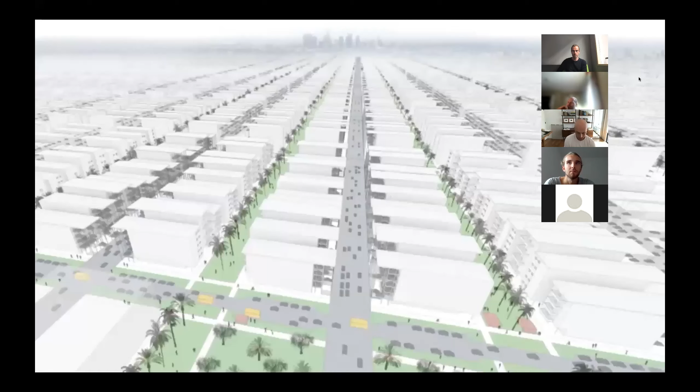A new zoning ordinance that outlawed dingbats, along with the recognition of their structural vulnerability, established a negative sentiment that rudely set the decline of the dingbat image. However, through officialization of its historic status and re-representation by artists in the 2000s, a new fascination in its image and typology rose. The re-enchantment of the dingbat reached a broad audience, including historians, architects, residents, and the mass public. Many consider this odd, sometimes ugly, building an important contribution to Los Angeles and contemporary life in the metropolis.

We will explore the dingbat's representation through three distinct timelines: economic, sentiment, and media. First, let's understand what a dingbat means formally.

The dingbat is a two-story wood-framed apartment building constructed between the 1950s and 70s, built to the maximum area of the single-family lot with tucked-under parking, 5 to 12 units, and approximately 7,500 square feet. They were cheaply and efficiently constructed for-profit development and fulfilled a need for medium-density housing, bringing many people to the city. The dingbat can be thought of as an exterior billboard facade facing the city with cheap housing hidden behind.

Diving into the three timelines that unravel the mystery of the dingbat. The prehistory of the dingbat is tied inextricably to the history of the growth of LA. Western expansion across the country and dreams of sunny weather and single-family home ownership caused the city of Los Angeles to grow from a minor city of 100,000 people in 1900 to more than 1.5 million in 1940.

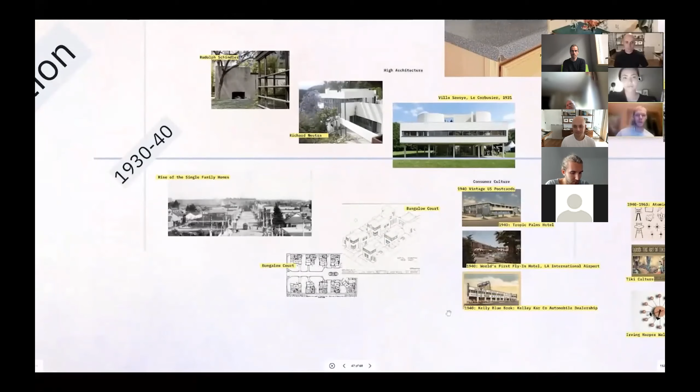As the city rapidly expanded, it was racially redlined in order to demarcate areas of security and desirability. With growth, new ways of housing the masses were needed, which resulted in California-born typologies such as the bungalow home and the tightly clumped bungalow court. The single-family home was the living style of choice.

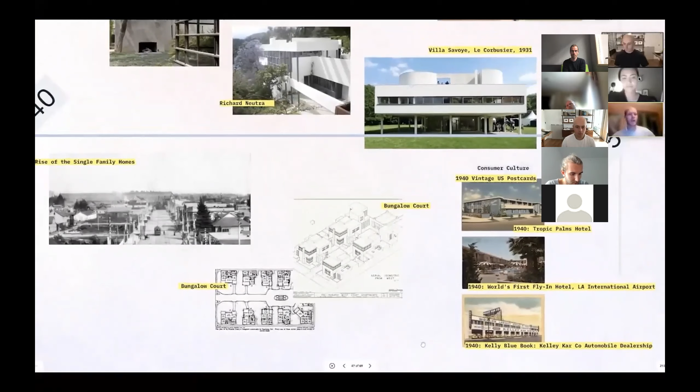Modernist architecture styles from Europe that symbolized ease of construction and new ways of inhabiting the world began to seep into the built vernacular of Los Angeles. These changes brought with it car-centric design and the rapid materialist consumer.

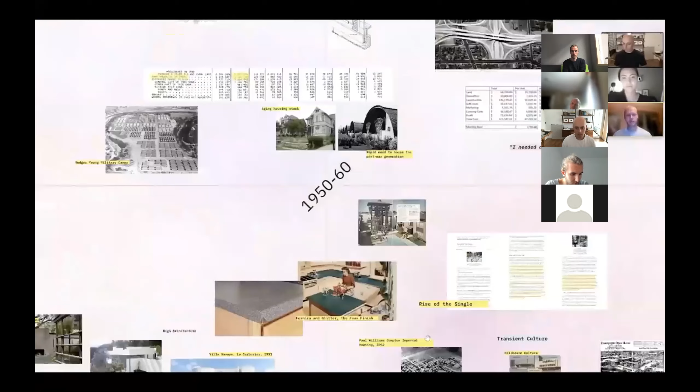Following World War II, the population increased by over 1 million in 15 years, prompting a boom in building and fresh ideas of how a city should be inhabited. Temporary military housing like Rodger Young Village was removed, and newly built freeways displaced Black, Brown, and other communities. An urgent need for the replacement of the housing stock was materializing.

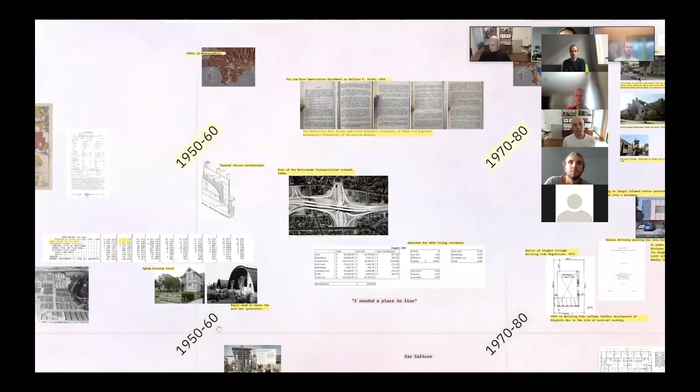With most land in Los Angeles taken up by single-family homes, many radical ways of building were introduced. The dingbat was a 2 to 3 story multi-unit dwelling with 7 to 10 units that occupied a single-family lot. This cheap but efficient mode of construction enabled housing relief, whereas the outer corners of the city experienced development on large swaths of land.

The dingbat allowed for living in the midst of the city near freeways and with quick access to places of work and fun. The popular atomic age ornamental doodads known as dingbats, which gave the type its name, allowed each residence to project itself as an existing billboard, papering over the repetitive generic design of units within.

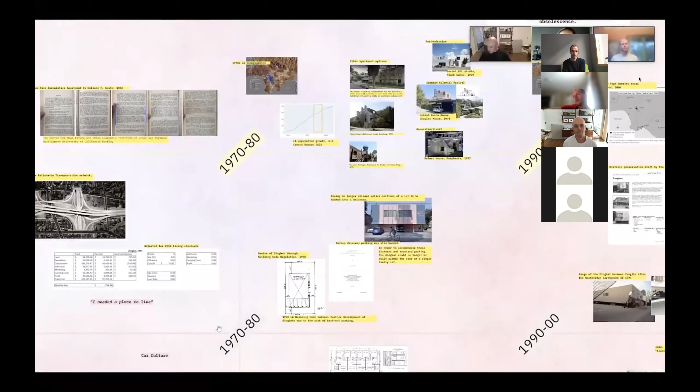During the 1970s and 80s, just as the dingbat became part of the cultural imagination, improvements to zoning requirements led to its decline. The new parking regulations passed in 1970 required 1.5 parking spaces for a 2-bedroom apartment. This made the dingbat apartment not as appealing to developers and essentially halted the building of the typology.

At this point, Reyner Banham had already brought the dingbat to popular culture and made its image iconic. The work of artists Ed Ruscha, Lesley M. Siegel, and Judy Fiskin, among others, feature the dingbat apartment prominently, as it can be seen from the street in the drive-by. These critical works of deadpan photography brought even more discourse about the self-advertising apartment in Los Angeles and the West Coast.

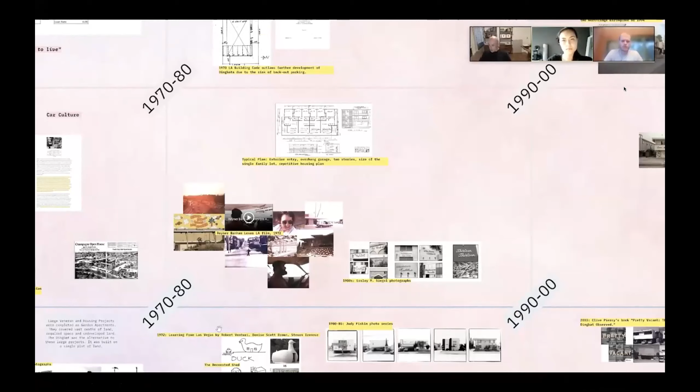The artists used mostly black and white photography. This medium sanitized the happy pastel colors and made the images archival and matter of fact, chronicling the dingbat as a phenomenon and embedding it in architectural and art discourse. Thus, the Venturi Scott Brown decorated shed has become a duck.

In the 1990s and 2000s, LA demographics solidified its status as a cultural melting pot. Middle-class families gained economic power. Mid-century buildings started to show their age. Demand for efficient densification threatened old-time relics like the dingbat with obsolescence. Responding to its quick physical degradation, but a small growing fan base, the LA Conservancy drafted a preservation plan for the dingbat in 2003.

The 1994 Northridge earthquake caused over 200 soft-story dingbats to collapse. Not too long after, in 1998, the film Slums of Beverly Hills underscores the economic divide in LA using the dingbat as its backdrop. The dingbat's reputation starts to decline.

In media, however, professional photographers start to capture the whimsicality of mid-century Googie architecture. Clive Piercy embraced the crappiness of it and spread his infatuation for dingbats in a 448-page photo series. His work responds to Judy Fiskin's deadpan technique using black and white photography. Some photos are in motion, while others are angled. This careless but honest representation addresses the typology through an outsider's perspective, which is increasingly less subjective.

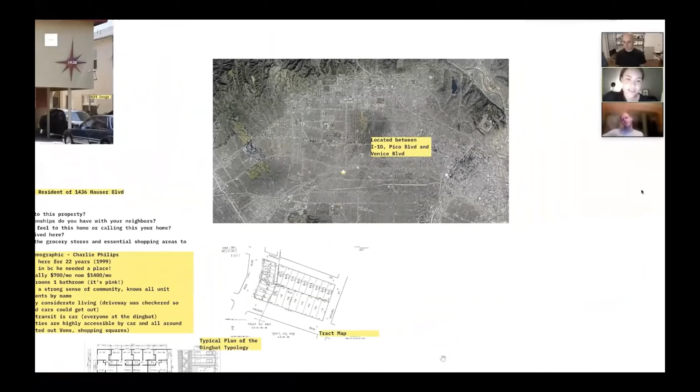And we got the opportunity to interview one of the residents there, Charlie Philips. When he first moved in 22 years ago, he just said, I just needed a place to live. 22 years later, he knows all the residents by name, and he feels the sense of camaraderie and community. And he now says, I enjoy where I live because everything is accessible by car and because he has the sense of community in this Hauser dingbat.

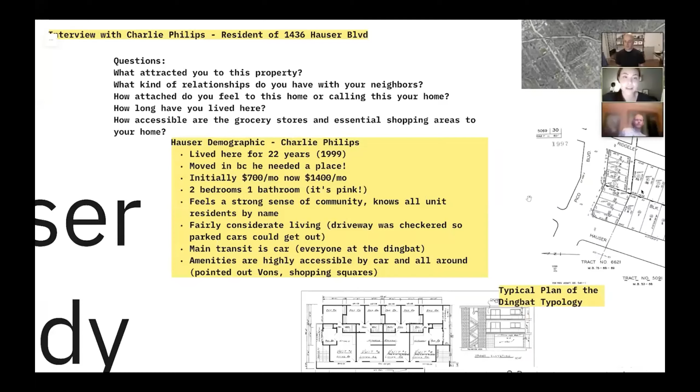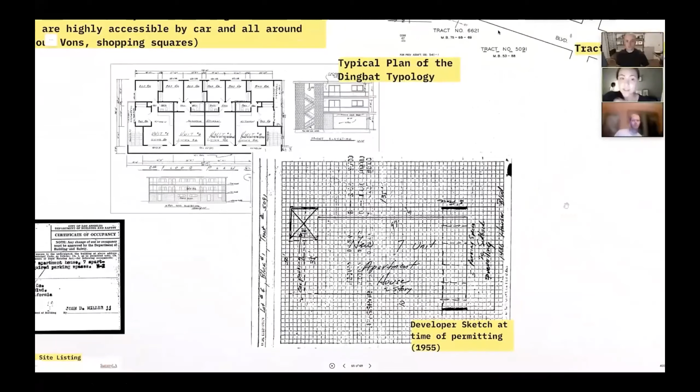This dingbat, from a collection of historical documents that we found on it, used to be a single-family plot, and now it's a multifamily property. The explosion of the dingbat was built on single-family lots back in the 1950s and became more and more available, taking advantage of and maximizing the plot, using the tuck-under parking to accommodate vehicles. It follows a typical dingbat floor plan, and it is currently listed as a historic site and is undergoing soft-story construction.

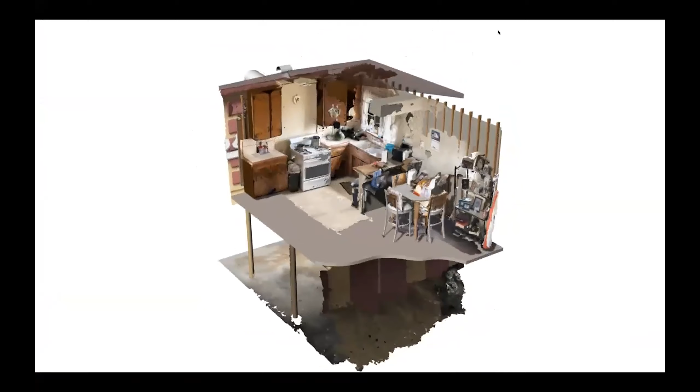During our visit, we took copious photos to create a photogrammetry model. This is a close-up of Charlie's apartment, mainly the kitchen and living room. Here are our results: a turntable of the model we made, showing the interior juxtaposed with the exterior of the Hauser apartment building.

And this is just a fun little piece that we made where you can move around and essentially create a dingbat as any contractor would at the time, a simple stucco box with some decorations.

So finally, the dingbat has represented an affordable housing type that is not only affordable, but also an attractive figure of what could be affordable. Questions of its sustainability still remain. How does this building give residents dignity?

Does it even matter? Owners will pay around $300,000 in the next few years to retrofit up to code, which may mean an uptick of up to $38 per month in rent for the next 2 to 5 years. With an increasing need for densifying metropolitan Los Angeles with affordable options, the dingbat may see more challenges functionally and financially down the road. At the same time, a rising tide of artists, historians, residents, and fans altogether may be its salvation. Thank you.

Thank you. Amazing, thanks, fantastic. So, wow.

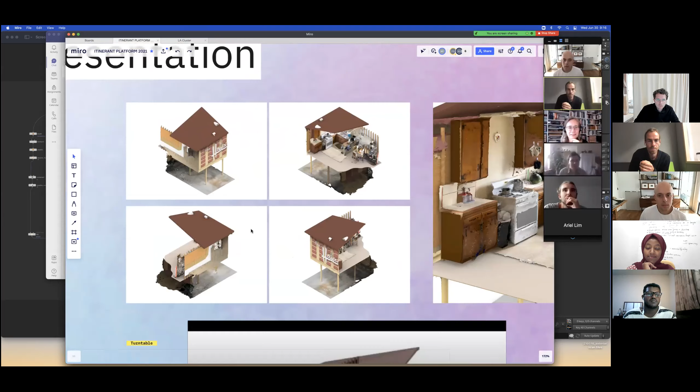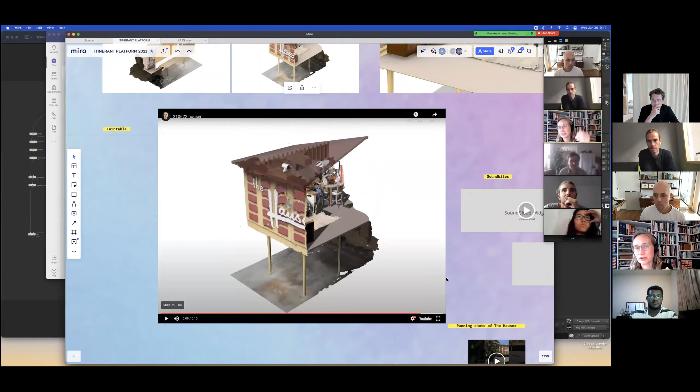It's interesting for several reasons. It's interesting because here you give us some information that's beyond how the exterior plays into popular culture and the imagination, and also because this interior image becomes a statement of artwork in itself, adding something to the representation of the dingbat. As far as I saw in the presentation, this hasn't been the focus of the many artists who have documented the dingbats, they've sort of stayed on the street. Could you share a few thoughts on what this adds to the representation of the dingbat?

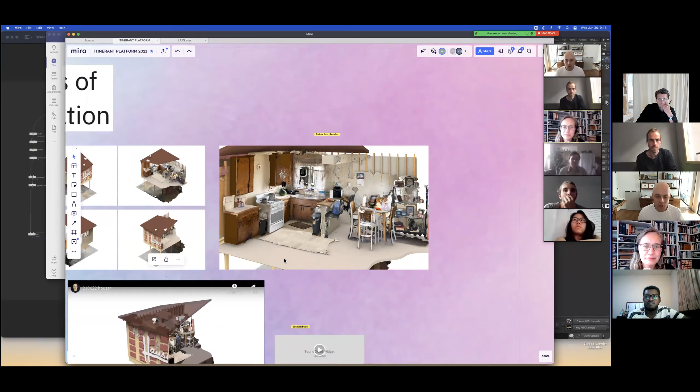Well, interesting you say that. We actually found that there aren't a lot of photographs of the interior, and we had the tremendous pleasure, and were honored, to be allowed in just as things were opening up after COVID. This gentleman let us in, and it was really cool to get to walk in. He's been there for 20 years, and it seems like a lot of the furniture, and the bathroom, wasn't changed, as if time was standing still from the 70s. So it was really interesting to juxtapose his kitchen, with his permission, with the exterior, because it's as if we get to look behind the curtain, behind the advertisement.

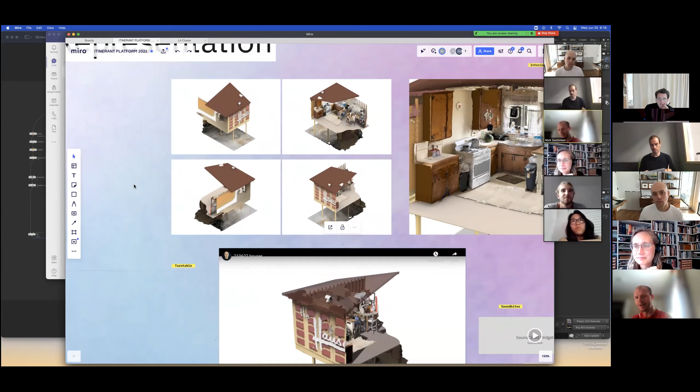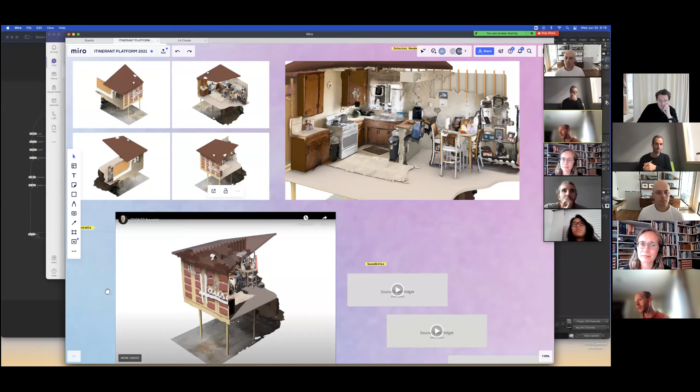Yeah, and we also noticed, as you did, that there isn't a ton of information about these interiors. They're kind of the hidden or introverted part of the building, whereas the billboard or facade has been well represented. We found it quite interesting that just in the last couple of years, with platforms like Zillow and other apartment rental sites, you're suddenly seeing these interiors photographed, maybe more in a commercial sense. So the collapsing of the two into one space, we thought, was the most interesting or relevant approach.

Mm-hmm. Yeah, what a great question.

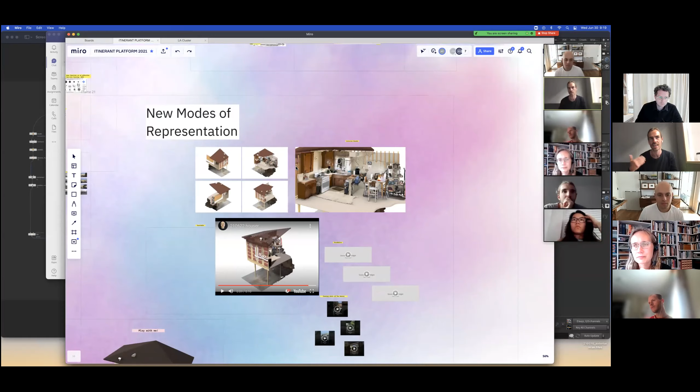I can't help myself to jump in, but I think that is so spot on, because as Natalia is saying, it's producing a new form of representation. It's seeing a new relationship between the iconic exterior and the imprints, the remnants of a lived life of Charlie, who lived there for about 20 years. This idea of looking behind the curtain is very interesting, because in one way it's a revealing of the inside, but of course it's also kind of a veiling, since a veil is something that can mask, because it is a new representation. Nick early in his presentation talks about rebuilding this kind of digital image of it, so we're relaunching it in some way. I think that discussion is very interesting.

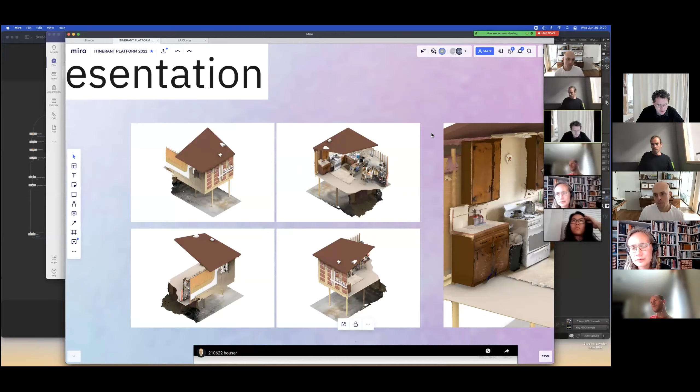If I can just quickly jump in as well, I think something you mentioned with regards to Clive Piercy and this kind of artwork, what you call the archival quality of something, that you can actually create content that makes things archival in a sense. It's a really interesting idea that we can keep producing things that offer perspective into something historical that can be used in the future and offers this new perspective. I think this idea of making our own content to create discussions is really important.

Overall, I think it was a really, really thorough presentation, and I just want to congratulate you on that.

A really interesting moment I want to return to briefly is the moment you identify that the LA Conservancy landmarks this building type. So rather than individual instantiations of this building type, we have the preservation of the type as such, perhaps unhinged from the specific author, the designer and/or the developer. There's also a geographic specificity in that these are all in the LA region, but we're not talking about one historically preserved neighborhood—this is diffuse across a larger geography. And I wonder, rather than reproducing those presuppositions, the erasure of the architect, the erasure of the developer, if we focus more specifically on the kind of financial structures behind these projects and this broad-based development you've identified, what that might begin to reveal.

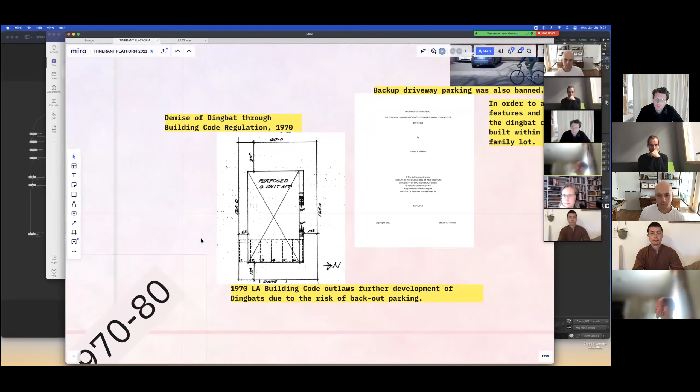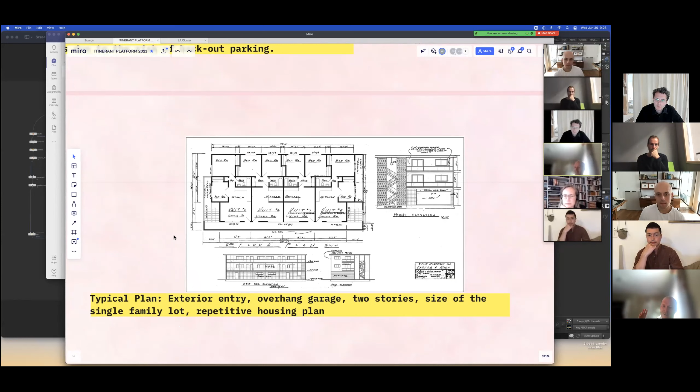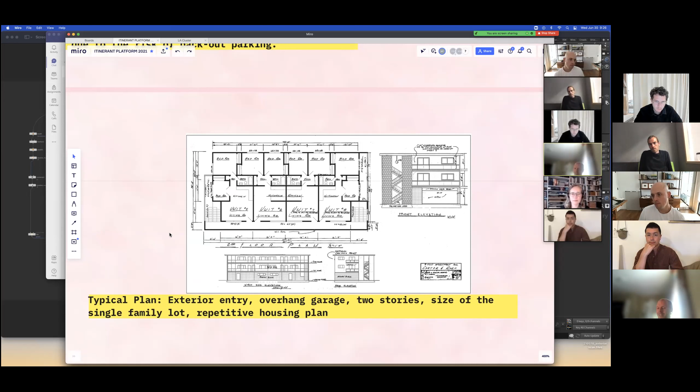I think maybe what I found most important was that they were simply using a single family building site. My understanding of affordable housing today is that it often needs to be a large project, and it doesn't change much if it's just housing 8 new people affordably. But what we saw in the 50s and 60s when these were built at a very large scale was that they were able to house many people affordably. LA's population grew by 1 million in 10 years, and many of the newcomers lived in these buildings. So it's about shifting from seeing affordable housing as something that must occupy a large project, to seeing it as something that can be done on a small scale many times.

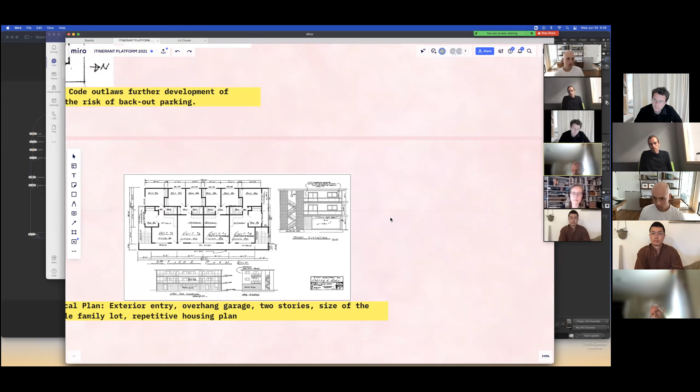I also think diversity in types is very important. We can't just be building 5 stories, and we can't just be building ADUs. There needs to be all kinds of versions fulfilled, because people have different lifestyles—some live closer to work, some live far away and they're okay with that. There needs to be different housing typologies.

Is there any concern that now that these buildings are preserved, they might actually lose their importance, or become too popular, and suddenly you're destroying the actual quality of this whole complex? That it's actually—you used to be able to do a lot of different things to the building, but now it could actually be doing more harm to the architecture than good by preserving it. That would be my worry.

I really like your presentation, and also this kind of optimism and naivism which you see in the early drawings, and it's kind of strange how it's also lost a bit when it gets updated and preserved. So it's difficult to keep this balance. What do you think about that?

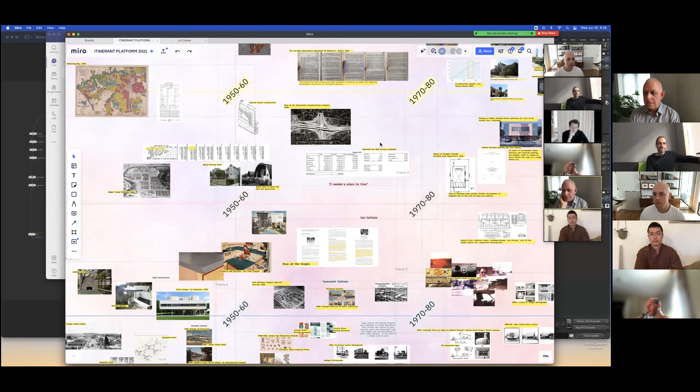Well, I think the dingbat has persevered because of the sheer numbers at the beginning, and as colorful as it is, I don't think it's self-aware. It just is what it is, and people choose to preserve it because, as human beings, we get nostalgic over things. And as has been pointed out in previous discussions by Masha, as the stock begins to deplete, and as some owners, landowners, and management companies choose to maybe demolish them unless they're preserved, there's going to be less and less of them. So that will increase the demand. And once they're preserved, their value also goes up, and interest and care for them will also increase.

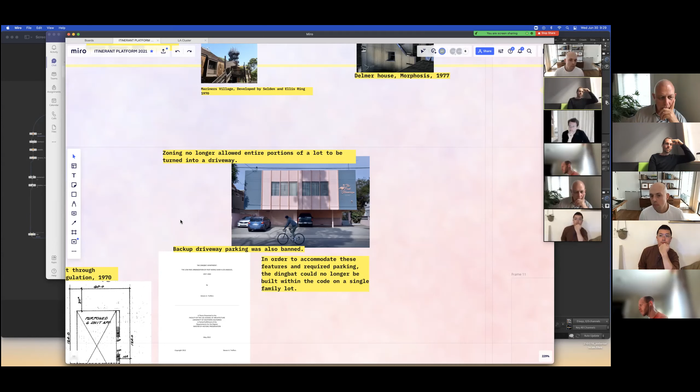So I think that will also invigorate even more interest, and maybe the typology could be updated for the current age—not necessarily mimicking it, but taking the qualities of density, the location, and things like that.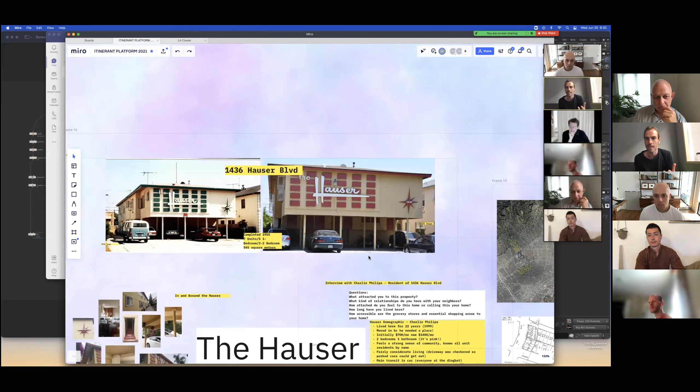We have to wrap up, but there's a lot more to go into, and the question of preservation—we can talk about the strategy of keep updating its image, and the idea of something that's preservable is something that's fixed. So its flexibility, its adaptability to different situations through the last 50, 60 years, is perhaps considered part of the dingbat. What is it going to become when it becomes a fixed image of—they want to preserve the idea of it and it's no longer contemporary? It's always been a part of culture more than, as we say, Charlie, who lives in the house, doesn't actually know that he lives in that house. So that's not where the house lives. It lives in culture, and in other forms of culture, which is also an interesting discussion. But I don't want to take any time from these really good questions.

I just want to say, maybe a last comment—I want to congratulate you for your amazing work. I love the way you take us through that, the flow moving between the images, how right in the beginning you situate us in LA, then take us through these 3 different ways of looking at the dingbat, and then bring us to your own reintroduction of another digital image and new representation of the dingbat. I think it's really strong. So thanks for your great work.

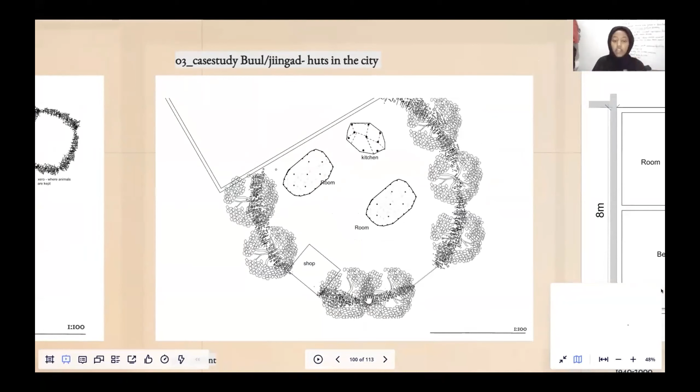Because it's more fixed in the city and people don't need to move from one place to another, they can expand their plan and add more elements. As the specific hut that we visited, we can see that the family set up a small shop at the corner of their house, showing this ability to expand their plan and add more elements to it.

Around the same time, another housing typology was developed: the old single-family house. It first started to appear during the British colonial administration. The British built these houses, mainly used by people that worked for the colonial administration, and also introduced new materials such as stone used to construct these houses.

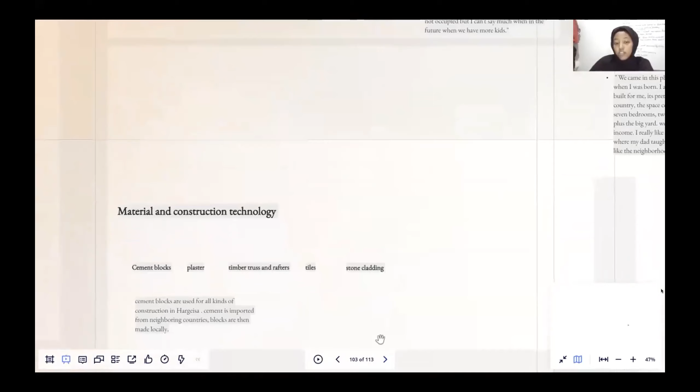Despite being expensive, stone provided insulation and durability, and most houses built back then still stand today. Later, people used different materials to construct these houses. Clay blocks were used when cement blocks weren't available, and now that cement blocks are cheap and available, they're massively used in the construction industry. For these old single-family houses, bricks were used to construct them, and then stone is cladded on top, as we see in this picture, to keep that decorative exterior.

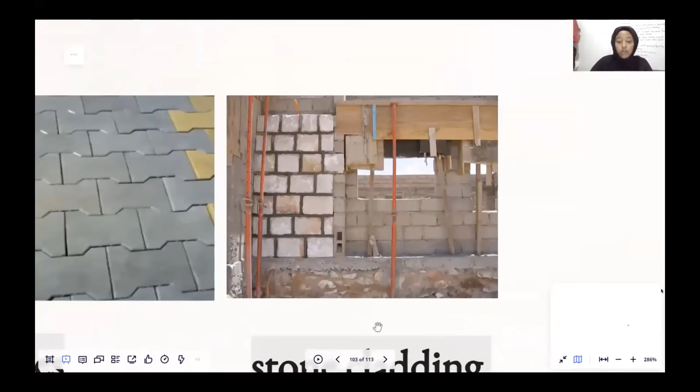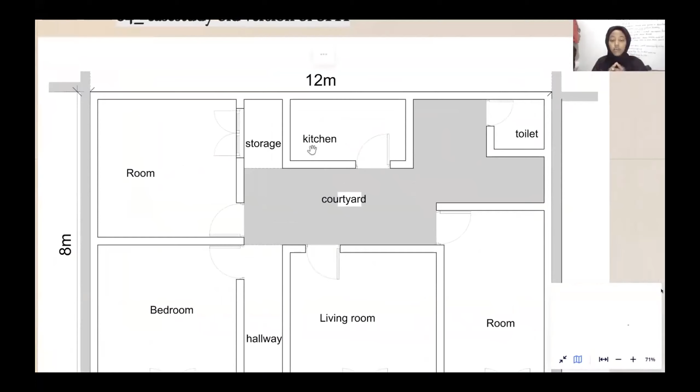In the plan of an old version of the single-family house, we see again the courtyard, but now it's inside the house. We also see the kitchen moving along with the courtyard inside the house. In this space, the courtyard works as a ventilation system, and it also creates a private, small space that can be gathered in, enclosed from the public.

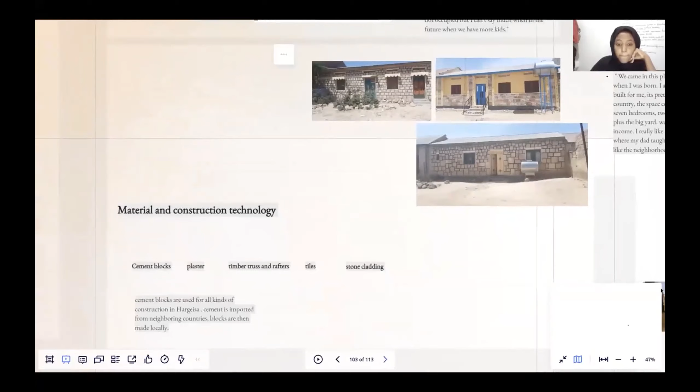These old versions of the single-family house were mainly built downtown in the city, or old Hargeisa. When the city expanded and the population grew, people started to move to the outskirts of Hargeisa, and a new typology came about: the new version of the single-family house, such as this one shown in this picture.

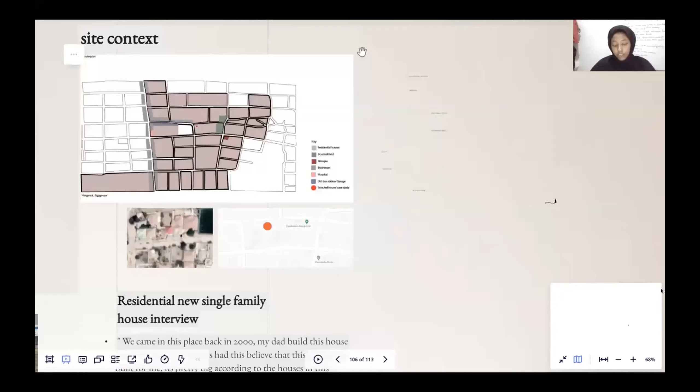The context of the outskirts of Hargeisa provided new facilities for the single-family houses, such as the ones we can see in this map. We can see sports fields and shopping malls, things that are not mainly present downtown, also accommodated into their context.

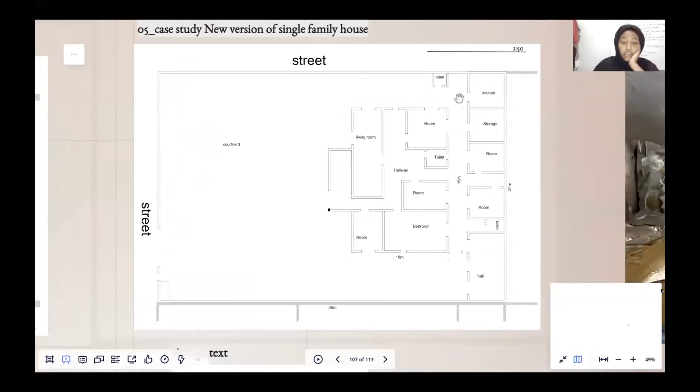We can see the plan here of the newer version of the single-family house. Interestingly, the courtyard has been moved out of the house, and now we have these perimeter walls surrounding this space, with the courtyard inside them. The kitchen also moves outside the house into the courtyard.

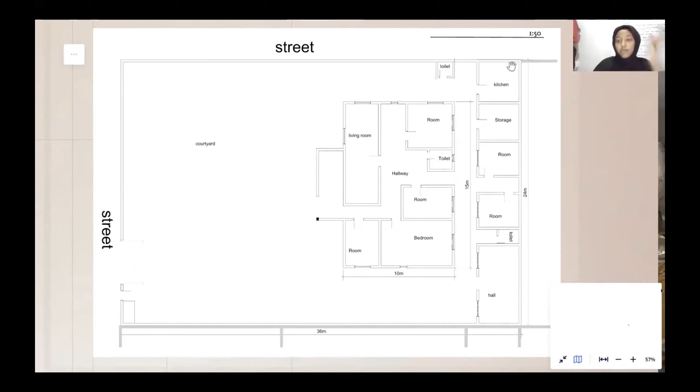Through this journey of these four housing typologies, we notice a couple of elements present in the nomadic huts that have also been transferred throughout these four housing typologies. First, in a hut, we see this beautiful fabric material used for the exterior to make it more decorative.

Somehow, we also see the perimeter wall of a newer version of the single-family house also cladded with these beautiful patterns of stone, to keep that decorative appearance on the exterior.

We also notice how the courtyard and the kitchen work together, moving outside and inside the house, in the huts and also in the single-family house. Notice the kitchen being moved outside into the courtyard in the newer version of the single-family house, same as the huts in the Aqal Somali.

Interestingly, throughout Hargeisa, we also find these enclosures in front of the single-family houses, same as the ones we find in Aqal Somali, where animals are kept.

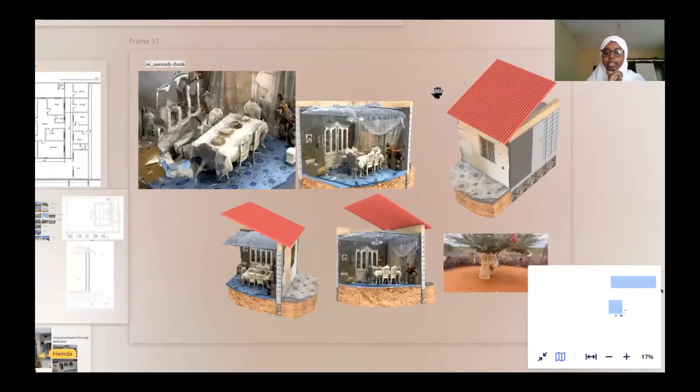If we go back to the nomadic huts, even back then it was obligatory to have such a space. We have the big tree as a presentable space for people or events.

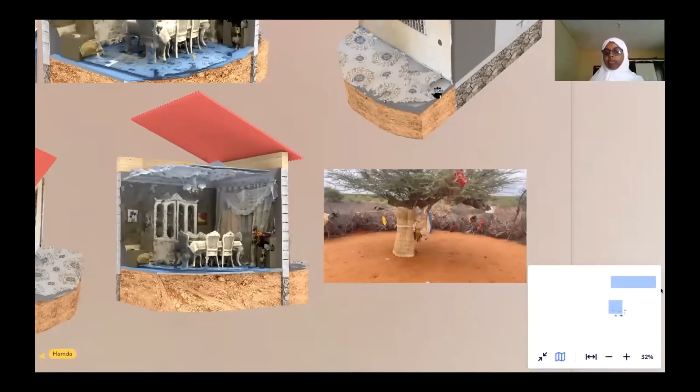Even during the process of making the photogrammetry, my mom was there telling me to organize the space so it looks very neat and presentable for the people who see the photogrammetry. Even with no physical guests, the elements of Somali hospitality are still there.

Okay, hey hi Rashid, good you could join us. I'm really sorry I'm joining you late, I apologize to everyone. That's okay, I'm sure you're busy in the office. I missed, I mean, it's...

Really fascinating, you know, this kind of history. It's a shame, I'm really sorry I missed it. It seems, yeah really, but you know you didn't, because I didn't realize, but I'm so happy that you actually joined us right at the beginning of the presentation.

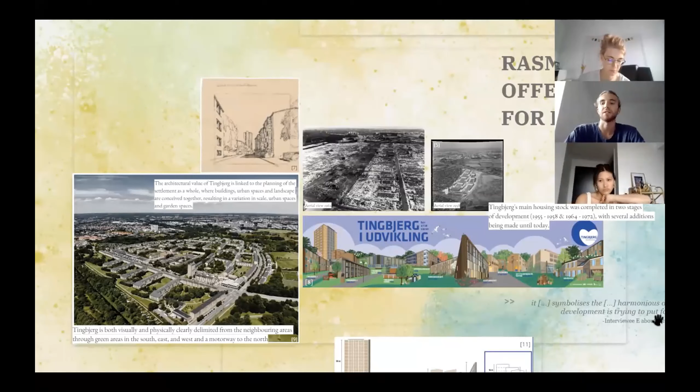Tingbjerg's main housing stock was developed in 2 major stages, from 1955 to 1958 and from 1964 to 1972, with several additions ongoing until today. The current redevelopment of Tingbjerg thus actively works with this narrative of Tingbjerg as always having been under development, posing this as a red thread and kind of justification for current changes to the built and social environment.

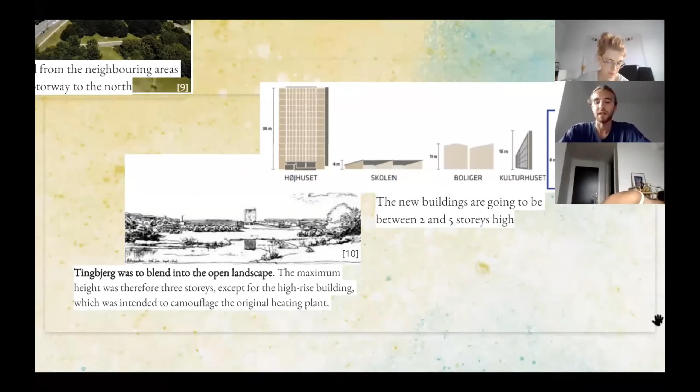As the new district was to blend into the green surroundings, the big majority of the buildings are 3-story high apartment blocks, with several exceptions, like a 13-story tall high-rise at the main street, which is also to cover the local heating plant, and then several different typologies that can be found in Tingbjerg.

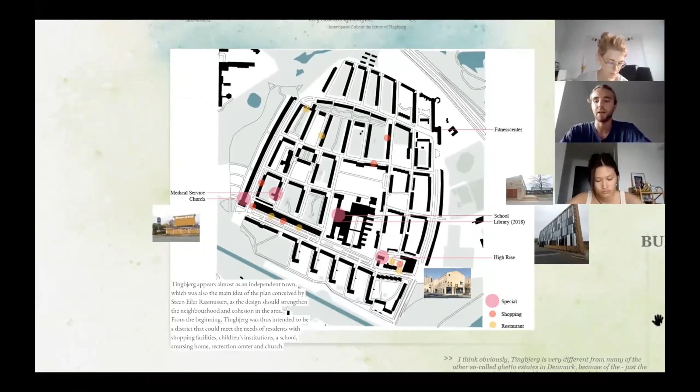Here is the aerial shot of Tingbjerg. There are different typologies because Rasmussen wanted to build the place with the concept of a city within a city. By including public institutions like a school, a medical house, a church, and furthermore shops and restaurants, Rasmussen hoped to include the benefits of life in an urban area and to contribute to the best possible living.

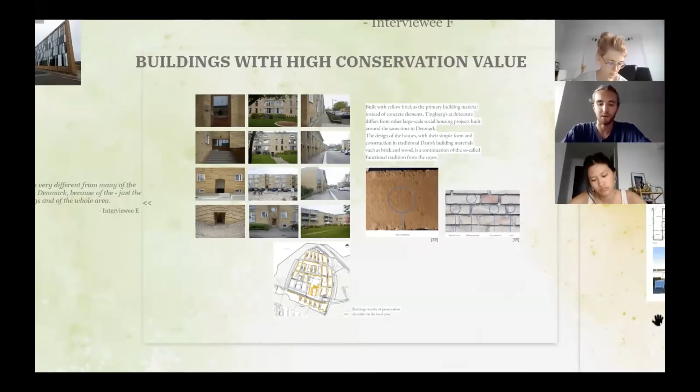The appearance of Tingbjerg as a spatial unit from the 1950s is outstanding and thus today perceived to be a conservation value, mainly due to the use of iconic yellow brick on the facades, white shutters, and the characteristic roof shapes. As these recurring themes appear in the whole development, Tingbjerg today appears as a spatial unit in itself, clearly demarcated from the surrounding areas. This almost standardized appearance from the outside is also taken up in the floor plans, conveying a normative conception of family constellations and everyday routines within the Danish welfare society.

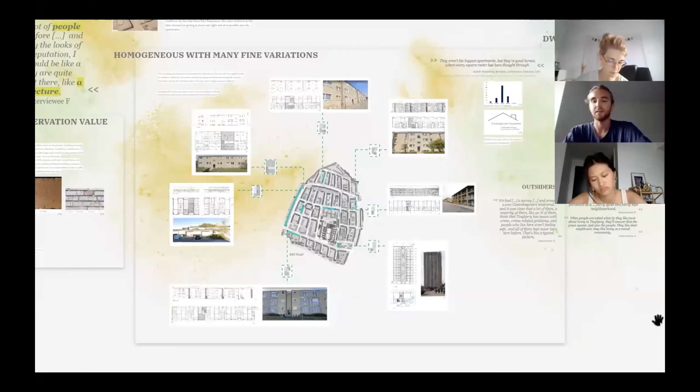It were thus the ideals of family and community life in a green surrounding close to the city that informed and influenced the development of Tingbjerg in the first place. It had also these very same ideals that are now taken up in the context of its redevelopment. In marketing the new housing units, the private developer makes clear references to these ideals of the past, stating: 'We have gotten a Tingbjerg that is version 2.0, and where the glorious values that were there at the beginning have been retained.'

However, as several interviews stated, Tingbjerg nowadays actually already is characterized by its green surroundings and small-scale architecture, which mainly caters to families. One of our interviewees said in this context that for the new branding of Tingbjerg, it is actually not so much about creating a new image through adding anything, but instead through showing how and what Tingbjerg actually is.

Tingbjerg's redevelopment is thus more of a political decision to impose the seemingly predominant ideal of social mix on the area than to actually change any conditions for the better for the current residents. It is hence the ghetto discourse that in this case influences changes in the built environment, and through this also changes in the social composition of the area.

By introducing an additional 1,000 private housing units to the area, about 3,300 more residents are expected to move in, and this share of social housing is to drop from the current 96% to 35% by 2030. With the introduction of private housing, one interviewee suggests that the whole redevelopment is aiming at attracting, quote, 'richer, more employed, whiter residents to move in.'

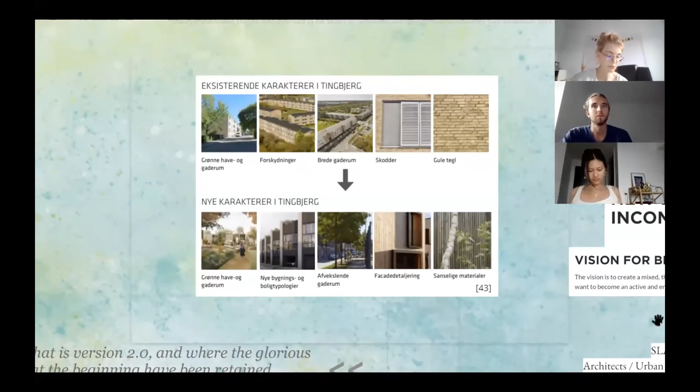To cater to this target group, Rasmussen's ideas of family life in a green area close to the city are kind of translated, as one of our interviewees stated, to modern needs, with a reduction of the total amount of free green spaces between the buildings and a downscaling of the remaining open areas. The existing characteristics of Tingbjerg are thus taken up and adapted to expected current needs.

Within the corresponding renderings, the new building typologies as well as some of the outer spaces are depicted, pointing to how the new and the old building structure are supposed to merge and interact with each other. A recurring theme within these is also the imposed social mix, so that these renderings visually communicate the envisioned ideals of the private developers for the future of Tingbjerg.

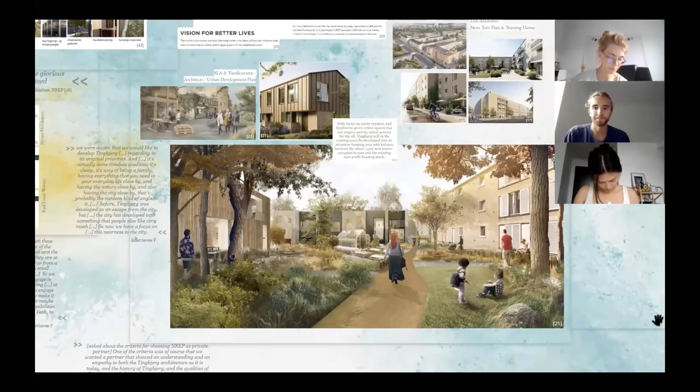However, the whole redevelopment is met by a lot of critique and resistance, formulated both by current residents as well as people working in the area. One point of critique, as formulated by people working in the area, is the short time frame of development, which would not provide for a sustainable urban redevelopment and the necessary participation of the current residents.

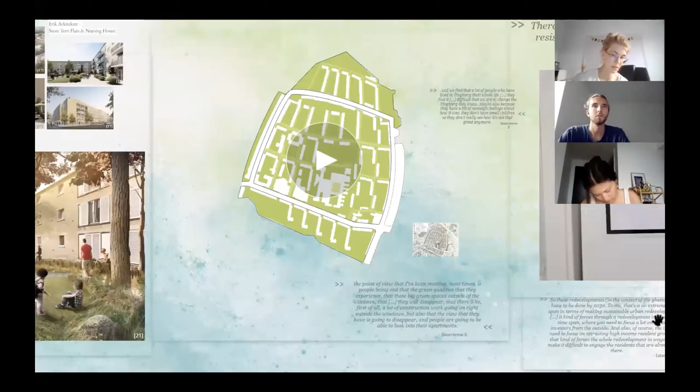To quote: 'It kind of forces through a redevelopment in a very short time span, where you need to focus a lot on attracting investors from the outside. And also, of course, the investors need to focus on attracting high-income resident groups. And that kind of forces the whole redevelopment in ways that make it difficult to engage the residents that are already living there.' By the residents, a lot of resistance is formulated

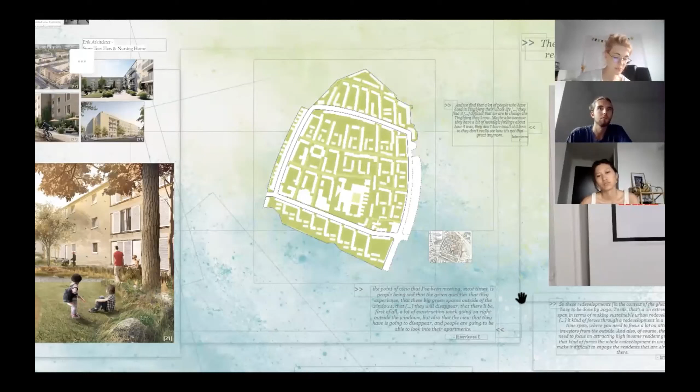in regard to the building activities in the short and middle term, and the reduction of green common spaces in the long term. As the private housing units are to be added through densification of the common spaces in between the buildings, the common green spaces as places of exchange will be reduced, which then again will also influence the social dynamics within the neighborhood.

Besides these changes in the built environment, current residents are very well aware of the changing social composition of the area as well, and they fear a social division between the current residents and the new residents, with the latter being the 'A-team' and prioritized by local decision makers.

A source of resistance is thus also how the redevelopment in Tingbjerg is communicated, mainly to the inside, with residents not really feeling well informed or at all included in the decision-making process, and even lacking basic information on the actual developments happening basically right in their backyards. This lack of communication, missing information, and inclusion in the process then also contributes to the fear of residents being evicted in the long term, although currently the social housing stock is not planned to be reduced.

However, while on the one hand the residents are now formulating their claims, real estate websites are already selling the new owner-occupied flats, which are supposed to be finalized by 2030. And it is not only the ownership form or facade that is going to be different to Tingbjerg's social housing stock, but also how people are imagined to occupy their own four walls.

So we actually wanted to understand how people nowadays occupy these spaces that were envisioned in the 1950s by Rasmussen to provide for the so-called good life. So to find out, we knocked on people's doors and asked for a glimpse inside their flats, and thus also inside their lives.

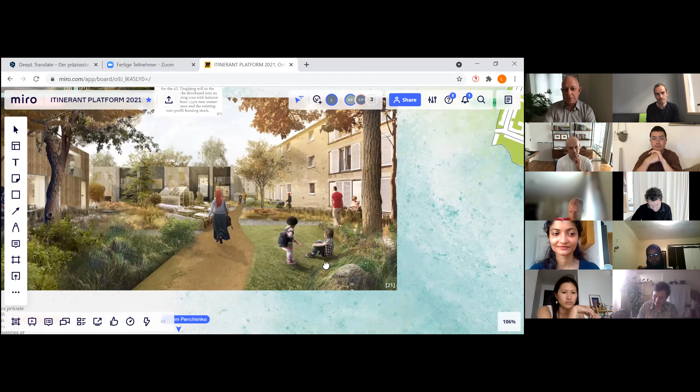With happy people playing in green fields, and it has nothing to do with what most people live, and it's deceptive, and it's dangerous. Sometimes I think it would be much better to go back to representations like you would do 50 years ago, where they were far more abstract.

There's something really seductive about this kind of images that takes away the discussion from the content of the architecture, or what we're doing in an area like this. So I think they're not neutral at all, they're really powerful tools.

It's interesting that we have these three different projects. You have LA from '59 and all the dingbat houses, which was one way of expanding the city very rapidly. This was Tingbjerg, which was the Copenhagen way of expanding, and then we saw from Somaliland also another typology of expanding. So you have these big movements in urban life, and you also see both in LA and here in Copenhagen how it's actually also creating a lot of problems when it's not done the right way.

Or maybe it's inborn that you have to redefine it every 50 years or something, but certainly things have to be worked over once in a while to still be alive.

That was a long one. Sorry. Yeah. It's a good one, and it could almost work as a concluding mark, unless someone is sitting on the edge of the chair to say something.